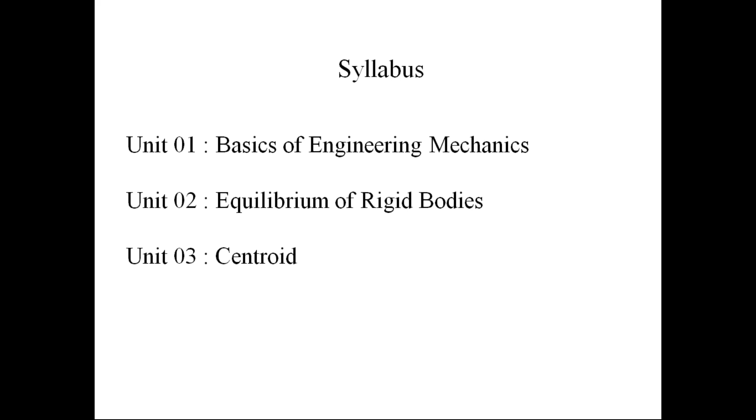Unit 3 is centroid. In the lower classes, you might have studied the basics of centroid, either in the intermediate or in the 10th class. But in this engineering mechanics, we are going to see the higher level of the concept of centroid. Up to a certain higher level, we are going to discuss that concept of centroid. The fourth one is dynamics of particles. The fifth one is friction and rigid body dynamics.

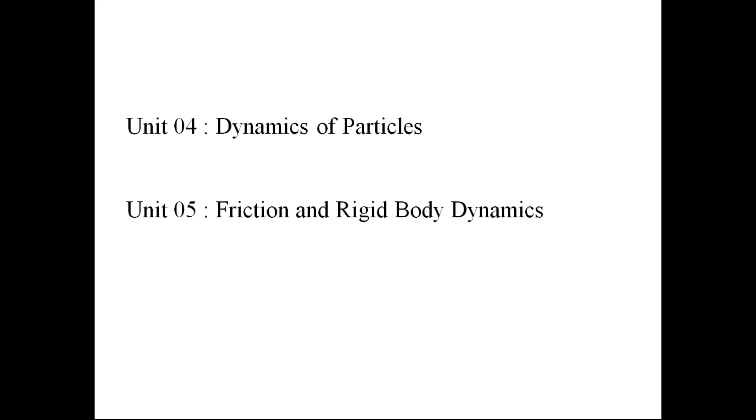This is the syllabus we have in this subject of engineering mechanics. Now coming to the textbooks. The prescribed textbooks for this subject: one is by S.S. Bhavikatti, Engineering Mechanics, New Age International Publishers. S.S. Bhavikatti, to some extent, a good book.

The next one is Dr. R.K. Bansal, Engineering Mechanics, Laxmi Publications. For numerical problems, this is a good textbook. But the third textbook is an important textbook in this subject of engineering mechanics from your examination point of view.

The third textbook is N.H. Dubey, McGraw-Hill Publishers, Engineering Mechanics, Statics and Dynamics. Excellent textbook. Even at JNTU Anantapur, they are following this textbook by N.H. Dubey, and even in semester examinations, you will get questions from this Dubey textbook.

So if anybody is interested to purchase a textbook in engineering mechanics, because it is an important subject, try to purchase Engineering Mechanics by N.H. Dubey. It is an excellent textbook, useful to you in the 4 years of civil engineering. So if possible, try to purchase it. Apart from these textbooks, we have reference books for the subject of engineering mechanics.

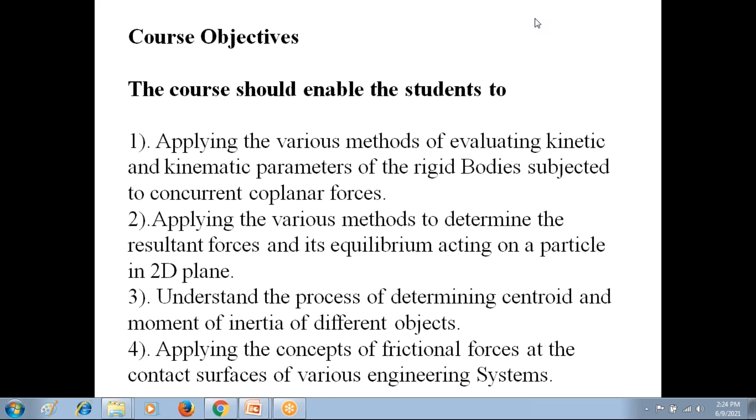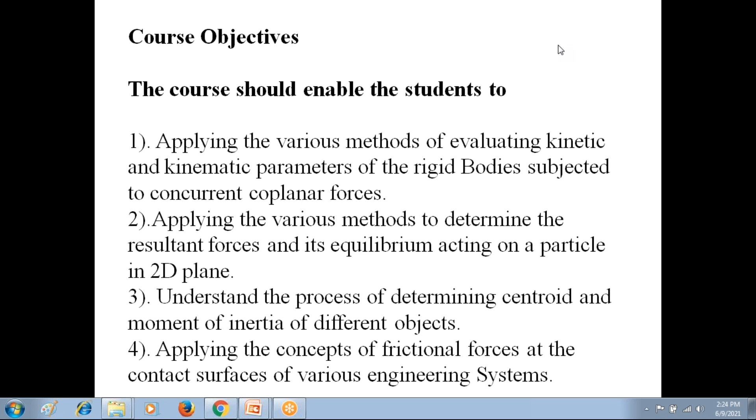Then after the completion of this subject, the students will get knowledge on some concepts in engineering mechanics, that is called course outcomes. Outcomes means in which areas the students will get familiarization. This subject of engineering mechanics has 6 course outcomes on 6 aspects in which the students will get familiarization.

So at the end of this course, the student will be able to understand the concept of free body diagram. Please follow that first course outcome. At present, nobody knows about this free body diagram. But after the completion of this engineering mechanics, you will all get familiarization on this concept of free body diagram, how to prepare the free body diagram. In civil engineering, this free body diagram is a very important concept.

At present, you don't know about this free body diagram, but after the completion of this engineering mechanics, you will all get complete knowledge on the construction of the free body diagram. Then the second course outcome: after the completion of this engineering mechanics, you have the knowledge on equilibrium equations. At present you don't know these, but once this subject is completed, you will get total knowledge on equilibrium equations.

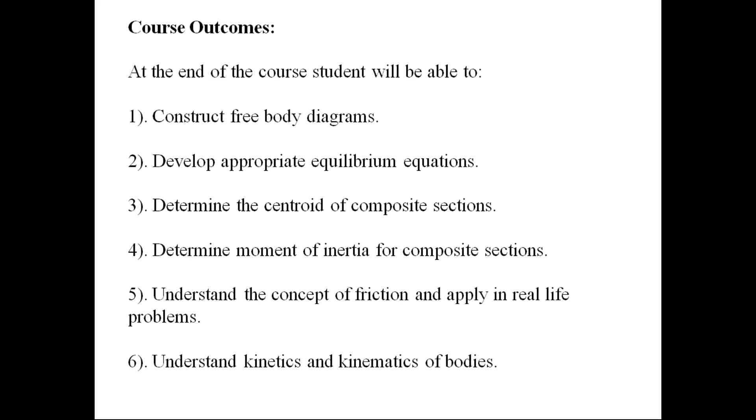So dear students, I explained the syllabus, the textbooks, the reference textbooks, the web references and e-textbooks, the course objectives and course outcomes. With this introduction, I am moving to unit 1, which deals with the introduction to engineering mechanics. What is the syllabus in this unit 1? This unit 1 has 3 parts. Check this syllabus on the cell phone screens.

In Unit 1, the first part is Basics of Engineering Mechanics. The second part is Resultant of Force System. The third part is Equilibrium of Forces. So please everyone go through the syllabus in Unit 1. At present, you don't know what a force system is. But after the completion of Unit 1, you will get complete knowledge on force systems and also how to determine the resultant force of a force system.

And after the completion of this Unit 1, you will get knowledge on equilibrium of forces. This is the syllabus in Unit 1, Part 1, Basics of Engineering Mechanics. Check that Part 1 syllabus.

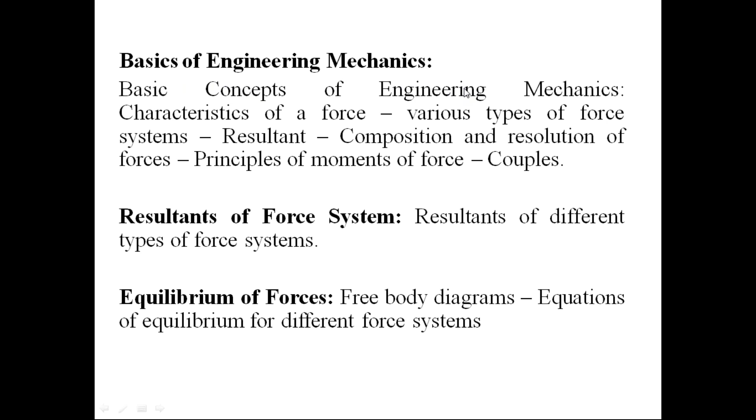In that Basics of Engineering Mechanics, we are going to study the basic concepts of engineering mechanics, the characteristics of force, the various types of force systems, the resultant force, the composition and resolution of force, the principle of moments and couples. This is the syllabus I am going to explain in Unit 1 of Part 1, Basics of Engineering Mechanics. Now coming to the concepts in Unit 1.

First, I would like to explain what is the definition of science. I hope most of you heard this term science at least from your third class. From the third class onwards, number of times you might have heard about this word science. But what is the exact meaning of that science?

The science is a systemized body of knowledge. The science provides us the systematic knowledge, not the irregular knowledge. So from this science, we are getting the knowledge in the systematic manner, starting from lower class onwards. So the science is defined as the systemized body of knowledge.

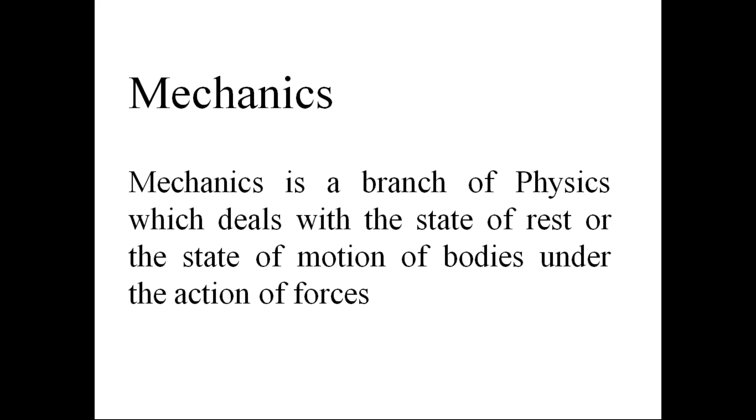The law of conservation of energy is a theoretical concept in mechanics. We are using that theory in so many applications, and that is called engineering mechanics. Not only in civil engineering, but in mechanical engineering, electrical engineering, and other branches, we are using the law of conservation of energy practically. I am giving you one example. Like that, we have so many applications. All the applications of the theory of mechanics are called engineering mechanics. So engineering mechanics is an applied science, not a theoretical science.

Check this definition, dear students. What is the definition of engineering mechanics? Just now I explained the definition of mechanics. Mechanics is a branch of physics. Mechanics is a theoretical science. If I apply the theoretical concepts of mechanics for practical problem solving, that is called engineering mechanics. Engineering mechanics is a branch of applied science, not theoretical science, because in engineering mechanics we are going to study the applications of the theoretical concepts of mechanics.

Please follow this second sentence carefully. Engineering mechanics deals with the laws and principles of mechanics. The laws and principles of mechanics are theoretical science. So engineering mechanics deals with the laws and principles of mechanics along with their applications. In mechanics, we study only the laws and principles, not the applications. We study the conservation of energy, it is a principle. We study Newton's first law, it is a theory.

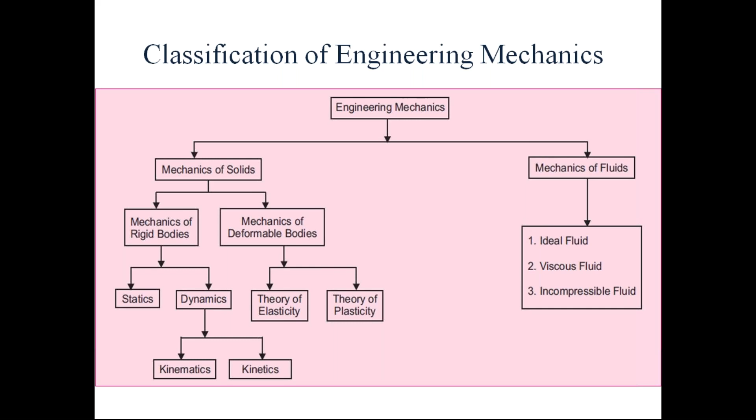So in engineering mechanics, I am going to discuss with you the mechanics of rigid bodies. In that, I am going to explain statics and dynamics. In dynamics, we will discuss kinematics and kinetics. That is the portion the subject of engineering mechanics will cover in the second semester. This is the classification of engineering mechanics.

With this, I am going to explain to you the concept of a rigid body. A rigid body is a solid. Please, dear students, everyone listen. A rigid body is not water. A rigid body is not air. A rigid body is a solid. Now the question is, when do we call the solid a rigid body? At present you don't know about the rigid body, so please everyone follow the definition of a rigid body.

When we call the body a rigid body, please focus on this picture on the cell phone screens. Please give me the response. Can you see this picture on the cell phone screens? Sir. Yes, please unmute the mics. Now, please check this diagram on the cell phone screen. This is the solid. Please unmute the mic, please.

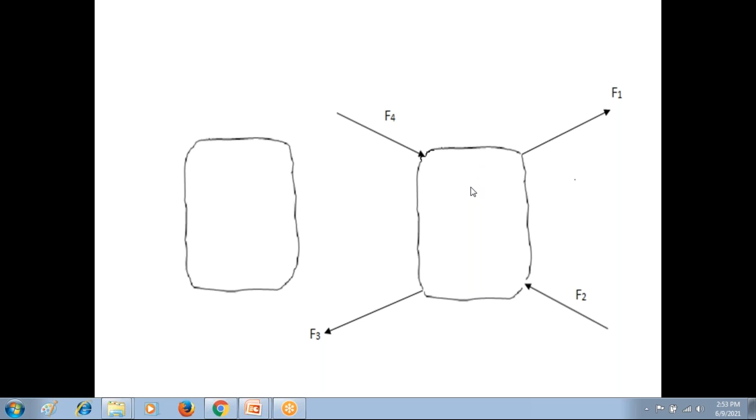So check the definition, a simple definition, no complications. Under the action of external forces, if the body has the same shape and size, we call the body a rigid body. If there is no change, it means same, constant. If there is no change in either the shape or the size of a body under the action of external forces, then we call the body a rigid body. Dear students, please everyone read this definition. If you have doubts, please ask me.

This is the first concept in engineering mechanics: the definition of rigid body. We call the body a rigid body if there is no change in either the shape or size of the body under the action of external forces. Even though external forces are acting on the body, if the body has the same shape and size, then you can call the body a rigid body. If anybody has doubts in the definition of rigid body, please discuss with me.

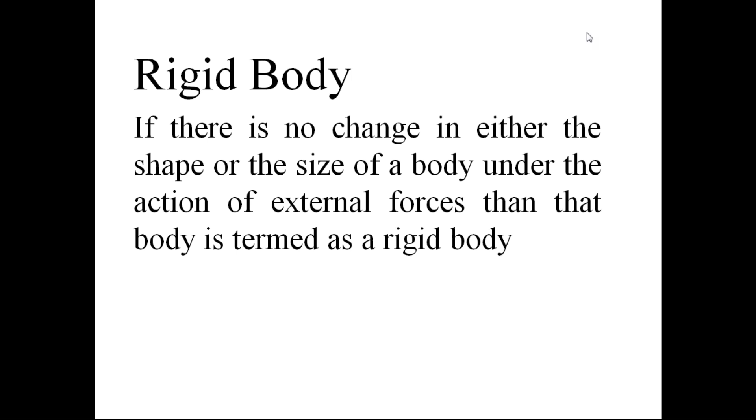So I hope you understand the definition. If there are no forces, the body has the same size and shape, no change. But even though the forces are acting on the body, if the body has the same shape and size, you can call this body a rigid body. So the body is considered a rigid body if there is no change in either the shape or size of the body under the action of external forces.

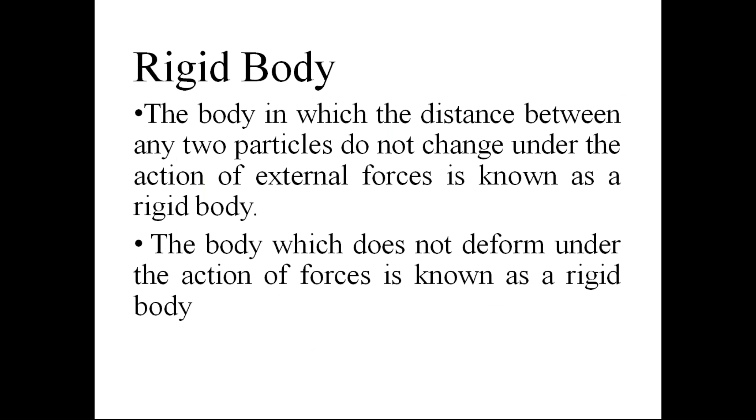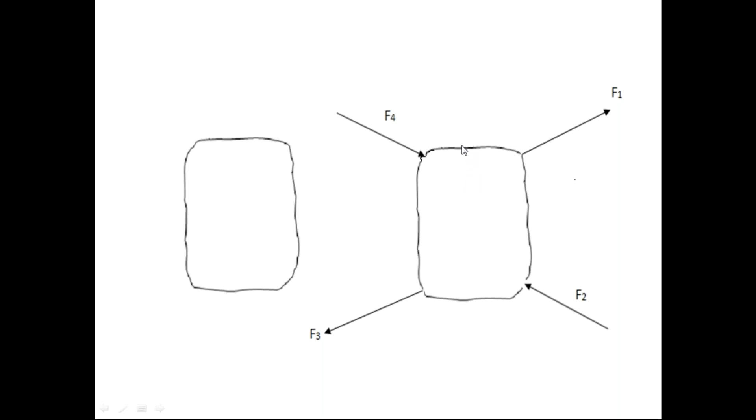So if the distance between 2 points in the body remains the same under the action of external forces, we can also call the body a rigid body. That is the second definition of rigid body. The first definition of rigid body: if there is no change in the shape and size of the body under the action of external forces, we call the body a rigid body.

Second definition: if the distance between 2 points in the body remains constant under the action of external forces, then also we call the body a rigid body. So in the rigid body, we have two definitions. The first definition, if there is no change in either the shape or size of the body under the action of external forces, we call the body a rigid body. Second definition, if the distance between 2 points in the body remains the same under the action of external forces, we can also call the body a rigid body.

If this body is a rigid body, then there is no deformation, there is no elongation, there is no compression of this body under the action of external forces. Since the size and shape remain constant even under external force, if the body is a rigid body, there is no elongation and no compression because of the action of external forces.

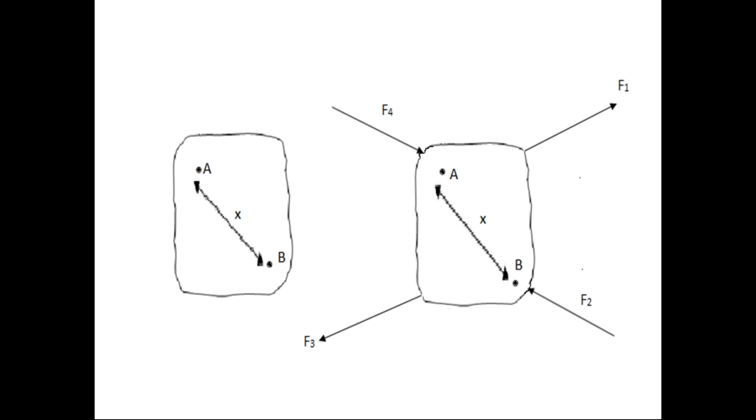In the subject of engineering mechanics, we consider all bodies as rigid bodies. In engineering mechanics, we assume all bodies as rigid bodies. That's why I explained this definition of rigid bodies at the beginning of this unit 1. So in engineering mechanics, all bodies are considered as rigid bodies.

So if anybody has a doubt about this definition of rigid body, please discuss with me. Any doubts, students, about the definition of rigid body, both the first and the second definition? It is a simple concept but important.

The first definition: there is no change either in the shape or in the size of the body under the action of external forces; we call the body a rigid body. Second definition: if the distance between 2 points in the body remains constant under the action of external forces, then also we call the body a rigid body. In this engineering mechanics subject, we consider all bodies as rigid bodies. That is the definition of rigid body in the subject of engineering mechanics.

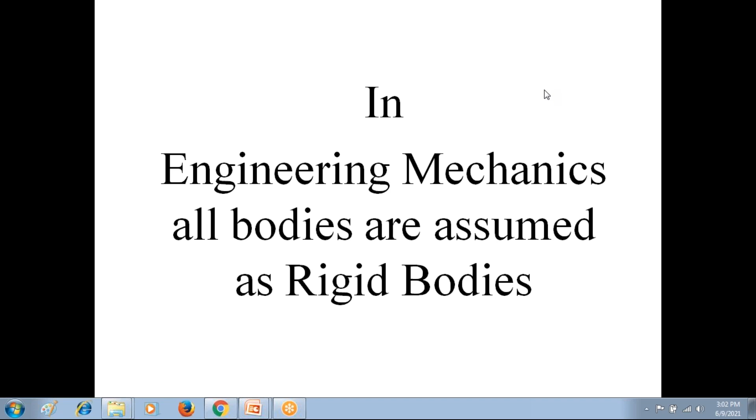With this knowledge of rigid body, we are going to discuss the further topics in unit 1. In unit 1, we are going to discuss the definition of force in engineering mechanics. Dear students, most of you from lower classes onwards know about this term force. Can anybody give the answer? What is the definition of force? Please don't say F is equal to ma. F is equal to ma is the magnitude of force, not the definition of force.

Any of you know the answer? What is the definition of force? Please give me that answer. If you know the answer, please discuss with me. What is the definition of force? So can I say? What is that, 103? Please. So can I say the answer? Okay. Give me the answer, 103.

Yes, sir. Force is a push or a pull that changes or tends to change the state of rest or uniform motion of an object, or changes the direction or shape of an object, the rest and motion of object.